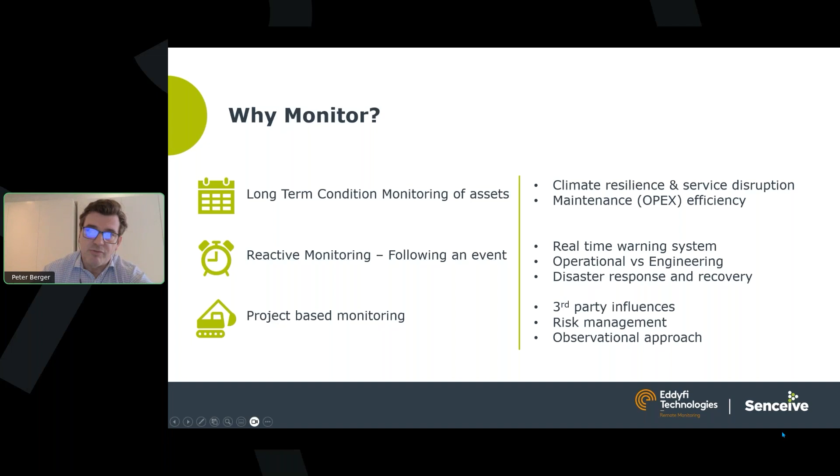And of course, you can have project-based monitoring, basically monitoring the influence of your works on third parties, or risk management during construction activities. Monitoring also enables you to follow a very important topic: the observational approach, using monitoring as an input to modify your design and improve your construction sequence.

Wireless monitoring is still monitoring. So basically, we still collect parameters with the sensors and our sensor interface nodes, like deformation, tilt, strain, pressure. But there are important things on site that can influence the decision to go wireless. For example, when you want to achieve a certain reporting rate, wireless obviously comes with some limitations regarding high reporting rates, and we're talking there above 1 Hertz.

And of course, it's a question of monitoring duration. Sometimes when you have a very long monitoring project, like a concrete dam for many decades, then maybe a wired solution is still a better option. But sometimes for standard monitoring projects, if you just have to implement a monitoring solution doing, for example, jet grouting below a track, wireless can be the better solution because you can deploy it quickly and you don't have to take care of cables and other things.

And of course, the job site itself, the conditions on site are important to consider. Is it a large or small area? Then it comes down to select the right communication technology from a wireless perspective. And sometimes, on construction sites, you have issues with line of sight that potentially limits the use of a geodetic-based system, and wireless comes with advantages on that side.

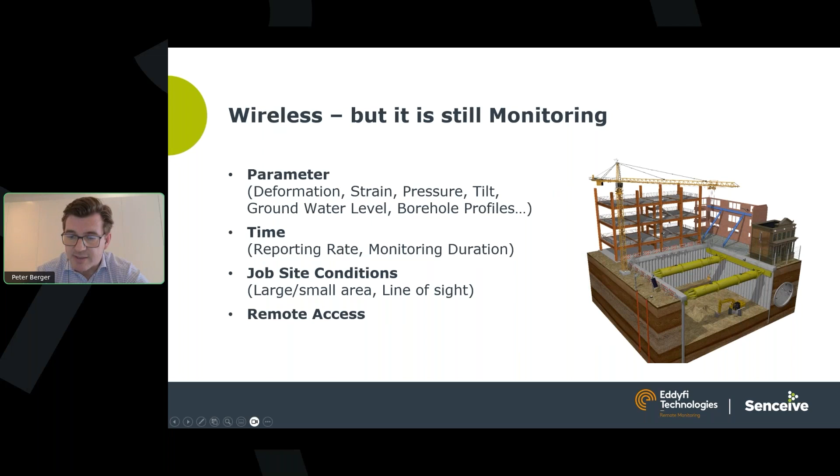And sometimes you have issues accessing site, so manual monitoring is not the solution. If you cannot access site, or if you have a very remote site, then wireless sensors and wireless interface nodes can still be a better choice.

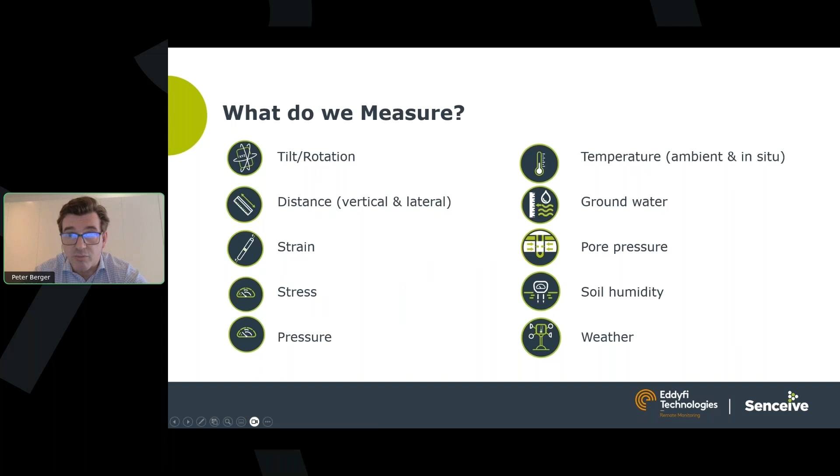But it's not only that some of our nodes measure something like tilt or distance - we also have a high range of wireless interface nodes that are attached to geotechnical instruments, which then collect readings regarding strain, stress, pressure, groundwater pressure, soil humidity, temperature, and other factors.

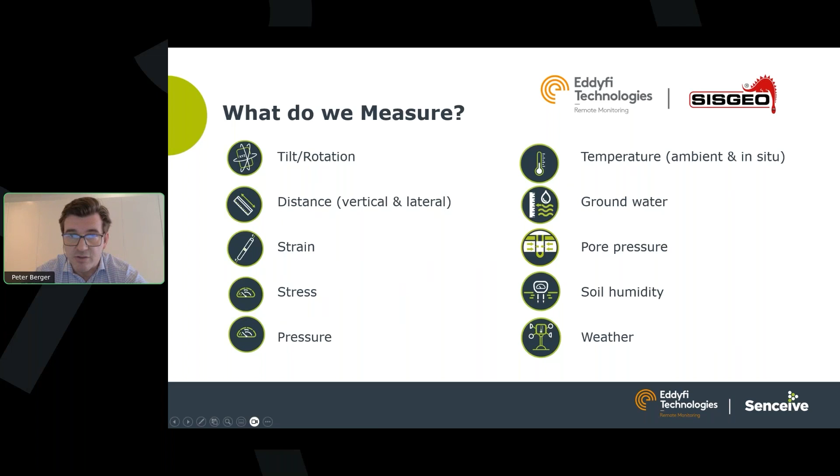And this year we welcomed Sisgeo from Italy into our Eddyfi remote monitoring family, which is the world leader in geotechnical instrumentation. Now, when you look at all these parameters and also consider the wireless data acquisition side, you have a one-stop shop where we can provide you with the best solution, combining the best of both worlds.

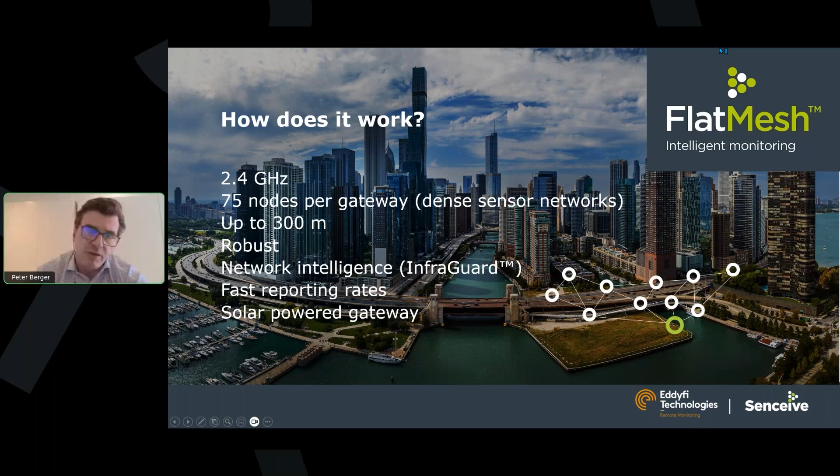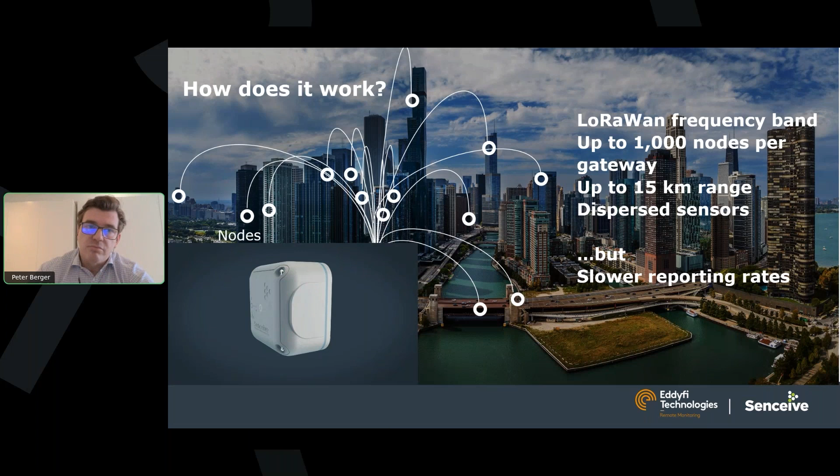We have also launched a new generation, GeoOne 2, earlier this year. You see here one of the nodes that comes with features like easy battery replacement, and also at a quite interesting price point for the market. This can be one of the two right choices for your solution.

But it doesn't stop here at the sensor level or gateway level. You also need to send the data to a server, you need to process the data. We have recently launched a Starlink solution for our GeoOne gateways and for our camera hub. But it's important to do something useful and intelligent with the data.

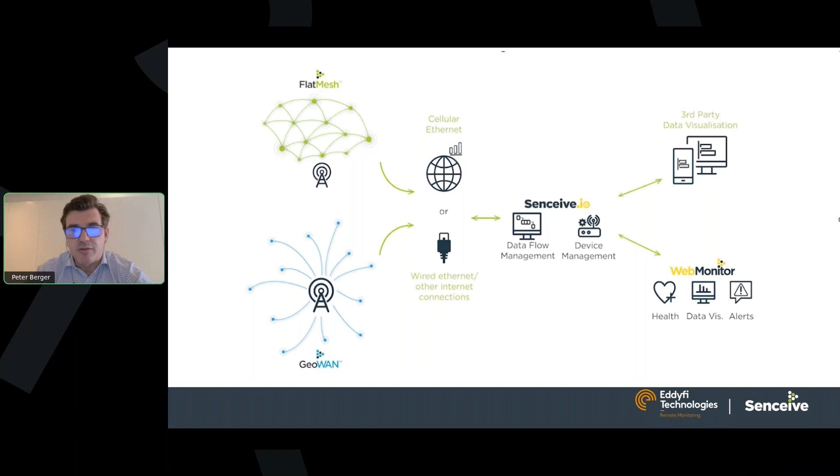We launched Senceive.io earlier this year, which is our data management platform where you can control your sensor networks and your sensors, and basically expose your data by an API to use with your own data visualization platform. We are also in the process of launching Web Monitor 4, the new version of Web Monitor, our data management platform. Our technical department is proud to be able to provide you now with a more modern and more intuitive solution to manage data, provide reporting and alarming functionality.

When you look at our website, and we are quite proud of our website and our digital marketing, you can see that there's a lot of focus on sectors. We talk a lot about sectors, and rail is our most important sector. In rail, it's about monitoring track geometry, slopes, rockfall, and structures like tunnels or portals.

Senceive has the right solution for that. We normally recommend the flat mesh solution because of near real-time data and responsiveness of the network. And of course, we try to meet the international standards that are important in rail.

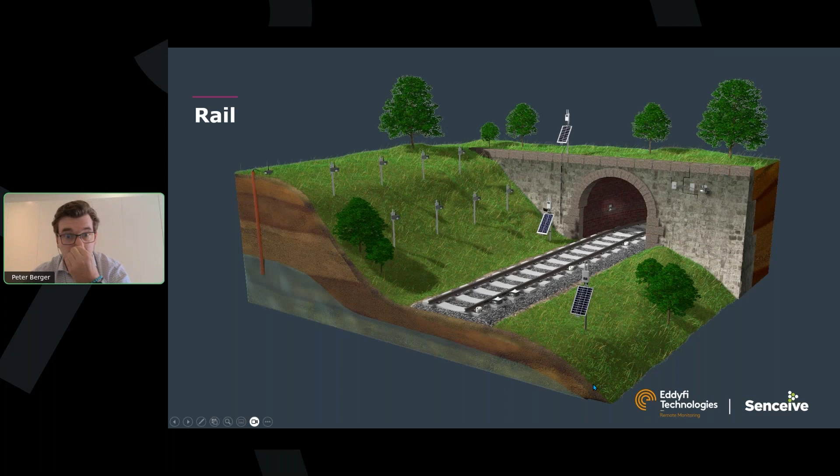If it comes to standards like the Euro norm 13848, which defines track geometry, or local standards like the Ril in Germany 883, you need to fulfill these requirements in order to be allowed to provide solutions to the railway infrastructure.

It's also about infrastructure as another important sector. We have dams, bridges, and other infrastructure like tunnels, and we know we have aging infrastructure in Europe with more than 10,000 bridges that require repair and maintenance in Germany, Italy, and France. This is an important factor, and wireless sensors can play an important role by keeping these assets longer in life and monitoring them to understand when there is a structural problem, so they can potentially close an asset to avoid the problem that could occur.

But also on construction sites, we know they are busy areas. You have open excavations, retaining walls, temporary works. We are still lucky that there are investments in urban infrastructure, and when these kinds of projects happen, we always have a very comprehensive monitoring regime. Flat Mesh and GeoWAN can be a useful add-on, or a useful wireless communication technology to use in these kinds of settings.

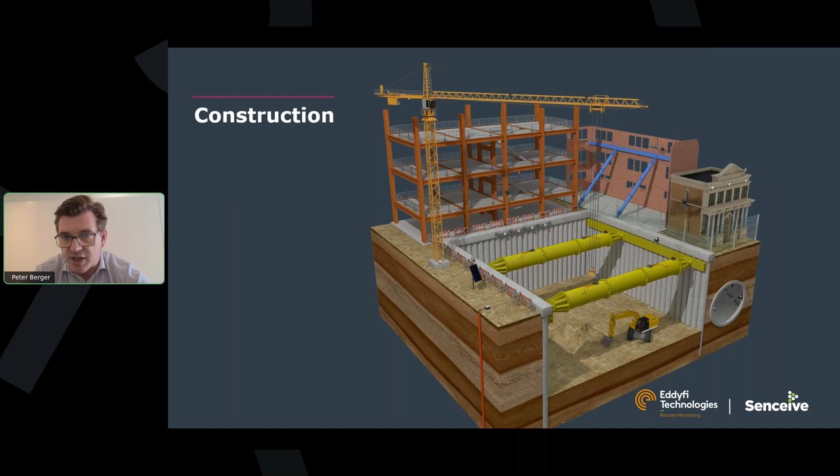I think everyone is aware of Euro Code 7, which still defines the geotechnical and infrastructure monitoring and design requirements in Europe, and defines what to do at what stage in a project. If you implement wireless as a solution, you can mitigate risks like cables being destroyed, or not having line of sight, and you have to react to changing site conditions. So a wireless solution can be the best option in this case.

But also in mining, when you have to cover larger areas, subsurface or on the surface, we know there are tunnel slopes. A big topic is tailing dams. We are quite active in tailing dam monitoring. This is a big topic. We had over the last 20 years several large tailing dam failures at mining sites in Brazil, also in the US, or 15 years ago in Hungary.

It's quite important to have a solution like our InfraGuard solution to monitor tailing dams, but also integrate geotechnical sensors into these monitoring solutions. Over the last years, there has been a lot of progress in defining global standards for tailing dam management, and the Global Tailing Dam Management Institute submitted this year a new standard for how to manage these assets. It's a quite important topic, and wireless sensors can play a very important role in that aspect.

Well, this is a lot of things we have presented in previous webinars. What we want to talk about today is our step-by-step approach, because there are companies that are quite experienced with using wireless technology, but we also always have new customers using wireless solutions for the first time. We follow a certain approach, trying to simplify adoption through a consultative approach.

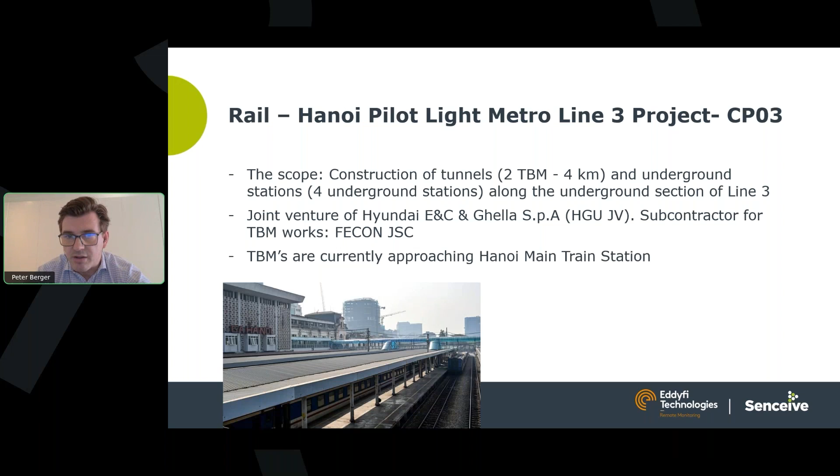The joint venture is of Hyundai and Ghella, with a subcontractor responsible for the TBM works. Currently, the TBMs are approaching Hanoi main train station, and we were approached by this customer months ago. They said they'd heard of wireless technology, and Ghella has used our sensors at other projects and wanted to use them to address a certain problem.

But how does such a project start? Basically, you get a drawing, and in this case we have a drawing showing the two TBM tunnels, a couple of railway lines, and on the right-hand side the Hanoi main train station. And we discuss what we can do.

When it comes to track monitoring, we try to offer the right solution. In this case we discussed the challenge and said a flat mesh solution would be the right choice, along with the track geometry requirements. They are mainly interested, as the TBM is underpassing these 5 tracks, in cant twist and in the settlement profile. They are not so interested in lateral movement.

So we said, okay, flat mesh gateway, nano and macro trackbed nodes are the right choice. We don't need an ODS for lateral movement. And this was months ago.

Then, of course, we discussed lead times, product certification in new markets, how we can provide local support, what are their reporting requirements, what are their expectations. It's an iterative approach, especially with first-time users, to figure out how we can support them. We can offer access to our Senceive Academy, where you find useful material to learn how to use our equipment.

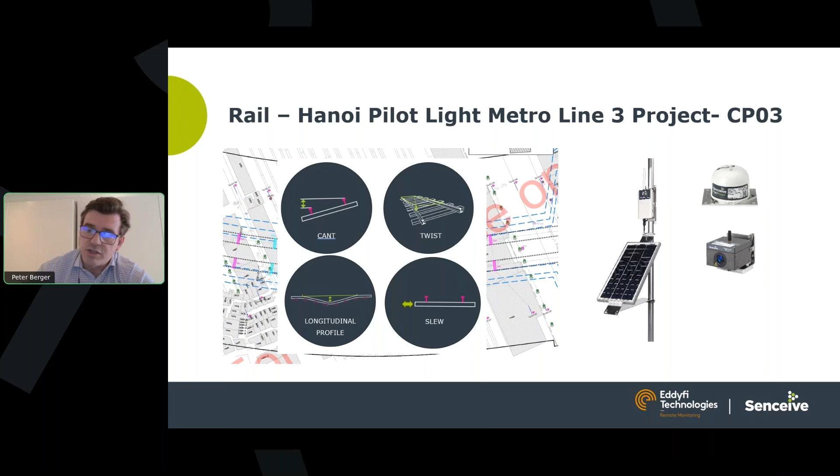But in the end, you need to convince the customer that this is the right choice, because a TBM project is a time-critical project, and monitoring is important to manage the risk.

So after months of discussion, the equipment, normally in such a project if you're successful, is ordered. We did the certification, and normally the equipment just arrives in time to be installed on site before the monitoring is supposed to start.

It's an iterative approach. We then discussed the number of sensors, the distance between the sensors, the right gateway location, and we help guide the customers through that.

In this case, they then started the installation. We have a customer support team, colleagues in the US, in Europe, and in Australia, where we try to provide 24/5 support. Vietnam is 7 hours ahead of the UK time zone.

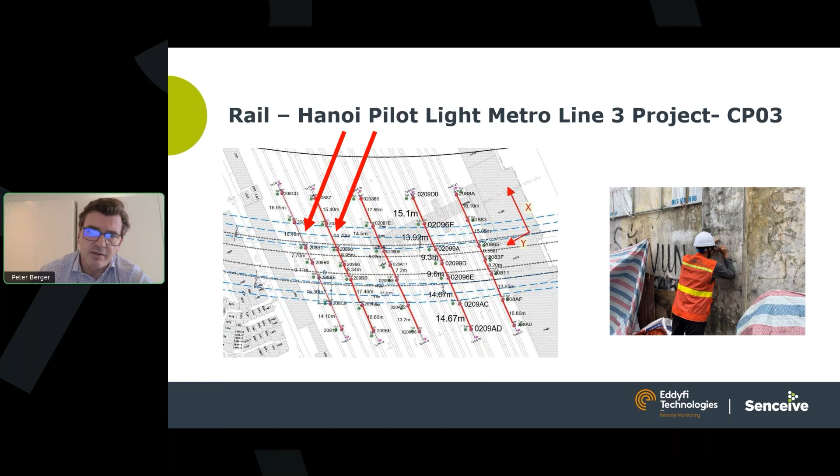But we sorted it out, and just yesterday I got the picture from the start of the installation on site. They installed the first two tracks on the left side here, and on each track 7 sensors. Then in Web Monitor you're happy when you see these 14 active nodes.

They obviously have watched the Senceive Academy properly. We advised them properly, and they were able to install it. It's also evidence of how easy it is to deploy that system. These 14 sensors have been up and running since yesterday.

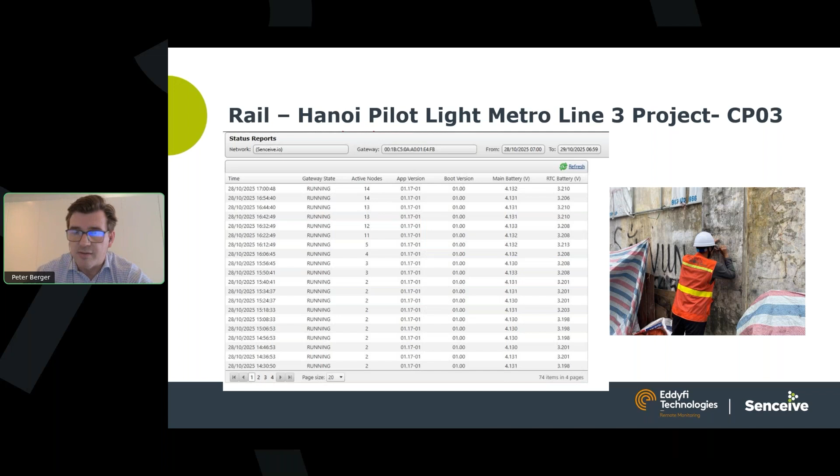Last night they installed the next one, and we are now up and running with the system. This is just a nice example where we provide remote support, and the customer on site can deploy that easily.

When this is the case, we then guide them through setting up the sensors in the web platform, in this case Web Monitor. We explain the data, help set up alarms and reporting, and look into temperature compensation in order to improve results. In this case, we have quite stable conditions on site, around 25 degrees Celsius plus, and quite stable.

And then, we have the 29th of October now, and as I said, normally things just arrive in time. On the 1st of November, the first TBM will pass below these tracks, and at the moment it looks quite promising that everything will be up and running - a nice example of how such a system can be deployed remotely.

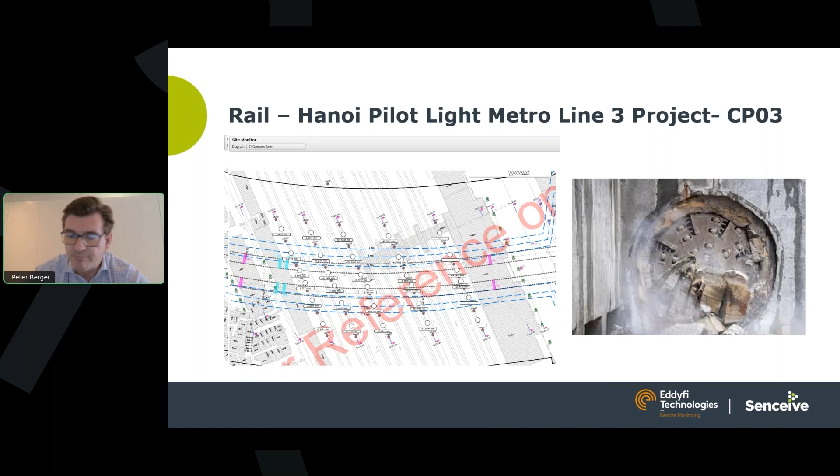First time customer, as I said, and hopefully right after Halloween we will have a first successful breakthrough into the Hanoi main train station box. Everything should go to plan.

And then I have another example from Germany, from a bridge project. We've heard earlier that there are tens of thousands of bridges in Europe that require repair, or some also need to be replaced.

In this specific case, one of our German distribution partners, Goecke, won a project with the Deutsche Autobahn AG, and this is a bridge in Bochum, the Herner Straße.

This specific bridge sits on rolling bearings with 2 abutments, and the abutment walls. It's an aging, very old bridge that started to move, so there's a risk the bridge deck could potentially slip off its bearings. Temporary wooden support was installed to mitigate the danger, but it still needs to be monitored to understand if the bridge deck would drop onto this temporary support - just a centimeter of distance needs to be observed.

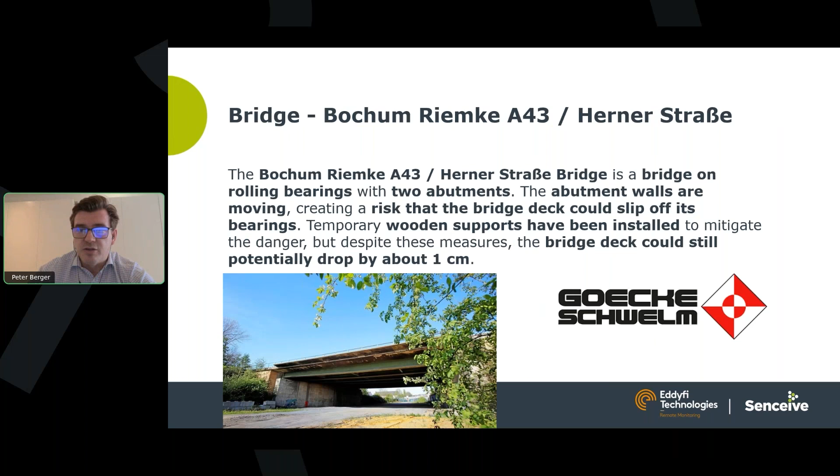So we see here an installation and an interesting customized solution from Goecke. In this situation, there are 8 tilt sensors installed - you see here on the left side one of the tilt sensors. They've been installed on the abutment walls to detect any movement of the wall.

If this is happening, there's a risk that the bridge slips off and falls onto this temporary support. So in addition, there was a special monitoring system designed by Goecke using potentiometric track sensors, and 8 of these devices were installed to monitor and find out if the bridge deck is dropping. Basically it's a binary yes or no situation, but this system allows us to observe that, and it's a very successful installation that shows some customization can lead to very smart solutions.

As a manufacturer of wireless sensors, we cannot always do customization, but we can help. And this is really a nice example of how a simple problem was addressed with a really nice and innovative solution.

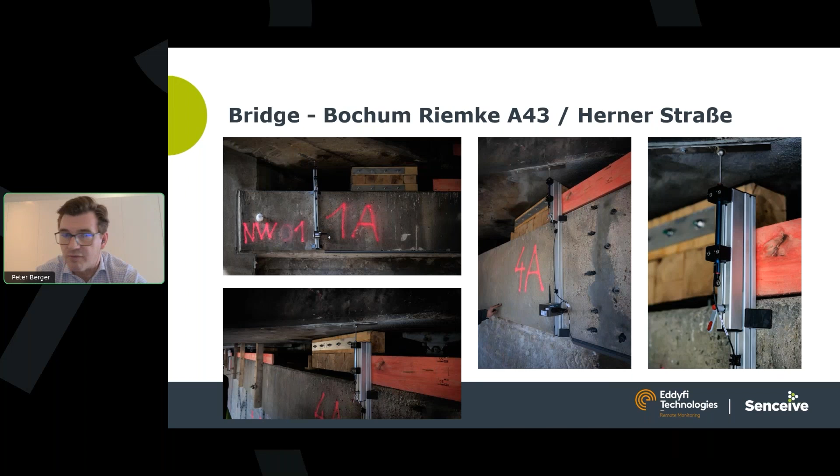Good, 25 minutes, so we stayed well in time. Sorry for the pop-up of my team messages - hopefully no messages were a little bit too compromising.

But to summarize, wireless monitoring does not have to be complex. I tried to summarize the different communication technologies that we can offer, and provide a quick overview on the sector offerings. Of course, I tried to show you our approach, our consultative sales approach.

Our sales team normally has experts in different fields, and we're happy to discuss your problems. You don't have to come to us with a big project - we're also happy to look into your problems and work together on a solution.

Just to show you how that works, the real project examples - we only had time for two. I think they also show that even a first-time user can implement the system far from our office location, 7 hours time difference, successfully, even with some time constraints.

Installation started yesterday, TBM will arrive on the 1st of November. And we're also happy to help our existing partners - we're really happy to have our partners in the different regions, so when they want to come up with a customized solution, we're also here to help.

In the end, it's about wanting to partner with our customers in order to have a sustainable success of the deployment of our wireless solution.